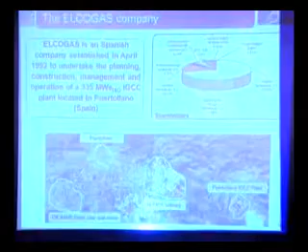In the beginning there will be a short introduction about the ElCoGas company. ElCoGas is a holding which has several shareholders. Among the main shareholders are utility companies like Endesa in Spain and Électricité de France, and there are some minor shareholders, among which is also the company where I work, ThyssenKrupp.

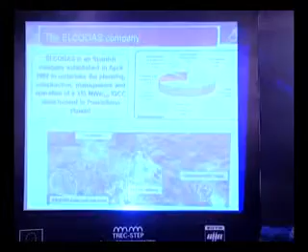It was established in 1992, and it was actually ThyssenKrupp that built the IGCC with 335 megawatt electrical output, located at Puertollano. Puertollano is a small city close to Madrid, and the IGCC is located there.

It's strategically very well located because the IGCC uses coal from the local mine, which is high-ash bituminous coal, and pet coke from the local oil refinery.

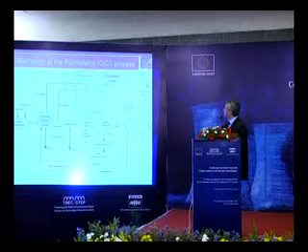The IGCC power plant has several blocks, let's say. There's the demo block, a gas turbine producing electricity of about 200 megawatt, and a steam turbine producing about 135 megawatt. But let's start from the beginning.

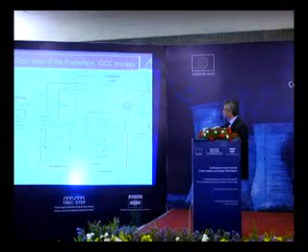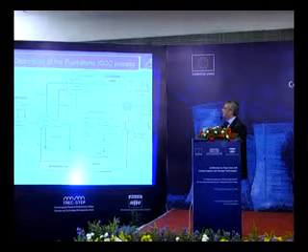The gasification part: first, the gasifier uses a mixture of coal and pet coke, about 50-50%, which are mixed together and supplied to the gasifier.

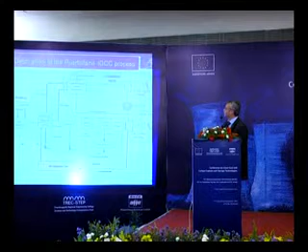The gasifier has a high pressure boiler and a low pressure boiler. Raw gas is produced, cooled down in these boilers, and then cleaned of particulates.

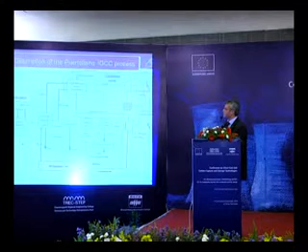Then it goes through water wash, venturi scrubbing, and the sulfur is removed, and then the cleaned gas is burnt in the gas turbine.

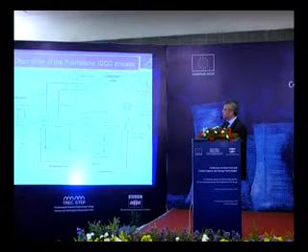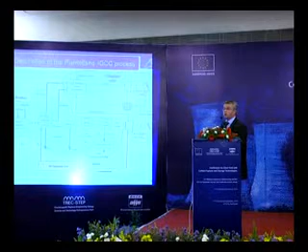The removed sulfur is recovered in a classical Claus facility, and the gas turbine drives the air separation unit, which produces the oxygen required for gasification.

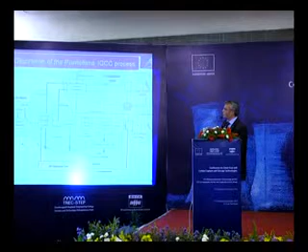The nitrogen which remains from the air is used for coal drying and for coal feeding to the gasifier. The gasifier is an entrained flow gasifier, pressurized at 25 bars, and it was delivered by the company where I work, ThyssenKrupp.

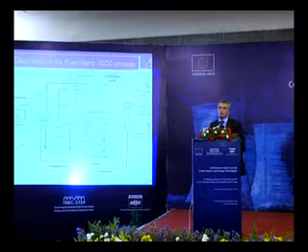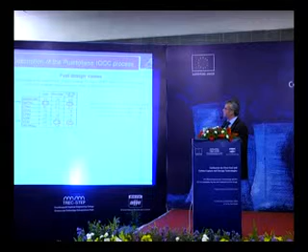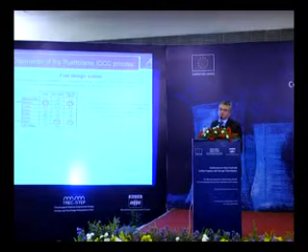So as I said, it was designed to gasify a mixture of 50-50 coal and pet coke. Why? Because the local coal has very high ash content, 41%, similar to some Indian coals, and 100% gasification of this coal would be impossible in an entrained-flow coal gasifier.

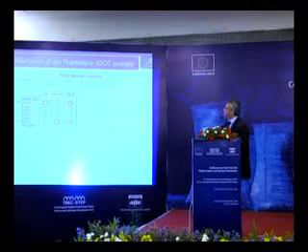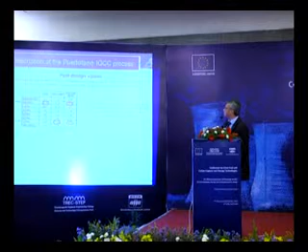Pet coke, on the other hand, doesn't have ash at all, but it has a lot of sulfur. So a mixture of the two gives acceptable levels of both ash and sulfur.

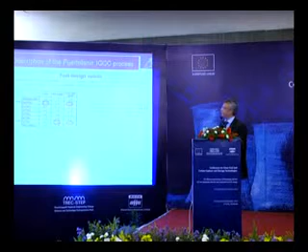With this mixture, the gross efficiency of the IGCC was 47.2%. And of course, the IGCC also has some power consumption, mainly from the air separation unit, so the net efficiency of electricity going to the grid is 42%.

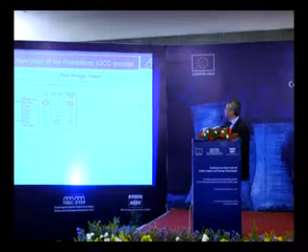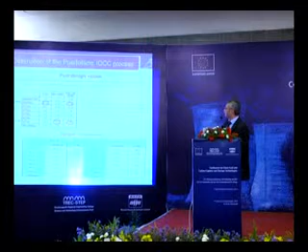Here, some examples for the syngas composition were provided as it was designed and as it was obtained. There are no big differences between them.

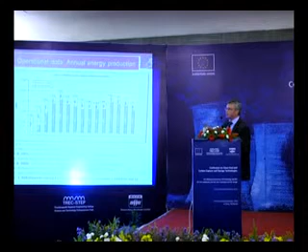There are some major issues in this period, 2004-2007, due to problems with the gas turbine, gas filtration, and the testing systems. But as it was the demo plant, the operators learned a lot about how to operate IGCC and what could be improved.

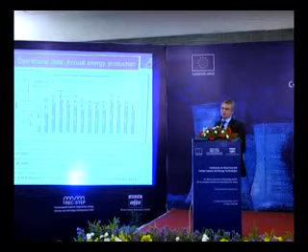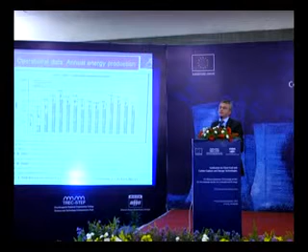So it was very valuable know-how and expertise accumulated here. Recently, the problem with availability is not technical. It's more that sometimes the price of electricity is very low, lower than the cost of production, so it's not profitable to produce electricity with IGCC.

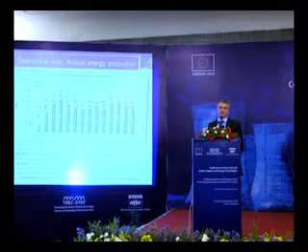If there is overproduction of energy from wind or solar, then IGCC has to stop so that the green energy can go to the market. This was the case in 2012.

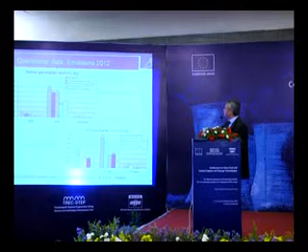Concerning the emissions, if you operate the IGCC with natural gas, the so-called natural gas combined cycle, the NOx emissions are below the allowed regulation. And if you run in coal IGCC mode, the NOx emissions are once again lower than allowed, and also lower than burning natural gas in the gas turbine.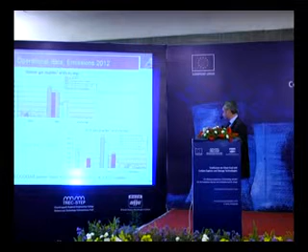The SO2 emissions and the particulates are very small.

So, operational data: the plant starts working at the beginning with natural gas, because there is no syngas available. First the gas turbine is put into operation, then when enough hot flue gases are produced and then steam, we can move to the natural gas combined cycle.

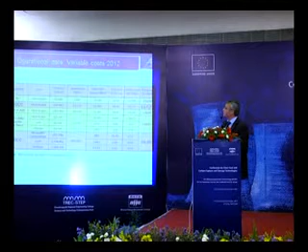After that, when the natural gas combined cycle is stabilized, we switch on the air separation unit and start producing oxygen. Once we have the oxygen, we can start the coal gasification, and when we get a stable coal gasification process, we go 100% to IGCC mode.

If you look at the total cost in euros per megawatt hour, comparing the NGCC mode and IGCC mode for the Spanish market prices of natural gas, you can see that for IGCC mode the cost of electricity is about 2.6 cents per kilowatt hour, while if you burn natural gas it's about 11.7.

So it's much more profitable to use IGCC than natural gas.

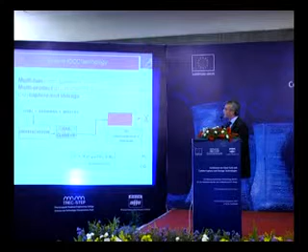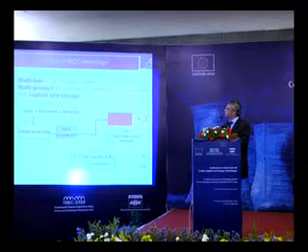Future of IGCC technology: the gasification itself provides many possibilities in the front end and in the back end of the process. You can use multi-fuel - coal, petroleum, biomass, waste - separately or in a mixture.

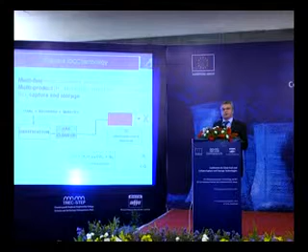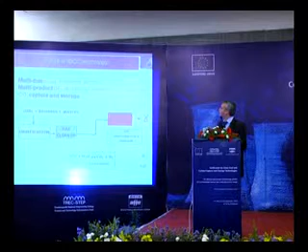In the back end, you can produce general electricity as in the IGCC case, but you can also produce hydrogen, liquid fuels through Fischer-Tropsch or MTG, or chemicals like ammonia and urea. So you have the possibility to choose your business plan.

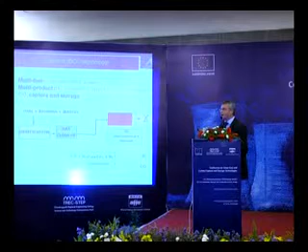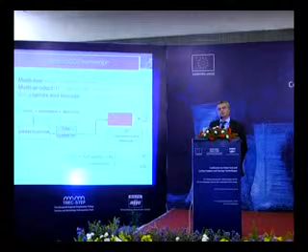IGCC or gasification technology also provides the possibility to capture CO2. You will see tomorrow in the more detailed presentation from Elcogas how it's done in Puertollano.

Production of hydrogen by co-gasification includes several main steps. The first one is, of course, to produce the syngas in normal gasification. The second step is to condition the syngas - you have to clean it.

So the fly ash can be removed, and particular sulfur components if necessary. Step 3 is the shifting of the water-gas reaction, so the carbon contained in the carbon monoxide is shifted energetically to hydrogen and carbon dioxide. This is an exothermic reaction.

You lose some energy, but then you can produce pure hydrogen and CO2 with this shift reaction. Then in step 4, you separate these two gases, H2 and CO2. CO2 can be stored or used for other purposes, and H2 can be used for ammonia production or to burn in a gas turbine.

But this is actually CCS.